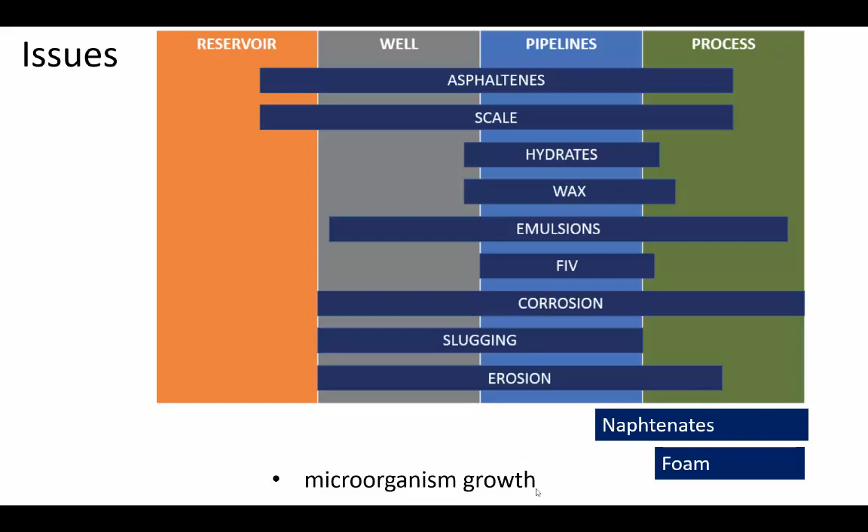My intention here is to simply go through at least a few of these, so we have a brief understanding of what they are, and then see how they affect the design or planning of the field.

Hydrates have a structure like shown in the upper corner, where you have water molecules forming a structure that houses small molecules—in this case, methane. They are formed at particular conditions of pressure and temperature. Essentially it's a solid structure that houses molecules of a relatively small size, a few Angstroms in size.

You see here what kind of issues hydrates can cause. You have a block of hydrate on the pipe, and here you have exactly the formation process—a video from DTU, Denmark Technical University, showing how the hydrate particles are forming.

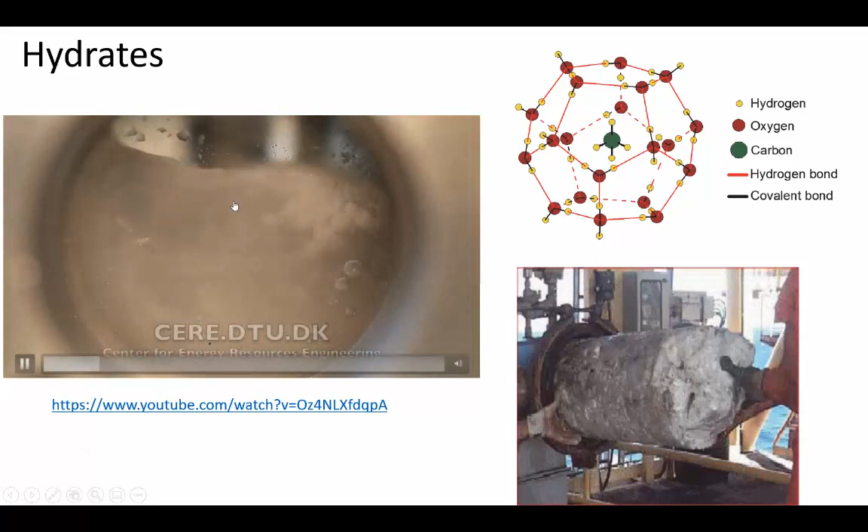Some of the conditions for hydrate formation: first you need water, because this solid structure, this crystal, is made out of water molecules aligned in a certain way due to the hydrogen bond. Then you have small hydrocarbon molecules, especially methane—you have methane hydrate, but you can also have hydrate of CO2, for example. And you need a particular range of pressure and temperature.

In a simplistic way, if we plot pressure and temperature, the hydrate equilibrium line looks something like this: for high pressures and relatively low temperatures, or for very low temperatures you have relatively lower pressures. All the area to the right is where you don't have any risk of hydrate, and to the left is where you have hydrate formation.

If we put here to the right, showing the same pressure and temperature diagram, I'm putting the phase envelope of the fluid in the pipe—the inlet, point 1, and flowing towards the outlet, point 2. What happens typically in flow lines and pipelines when transporting fluid from high pressure to low pressure, like the separator facilities, is that the temperature is reduced. Usually the environment is at a lower temperature than the fluid, so there's heat transfer and the fluid loses energy, heat, to the environment.

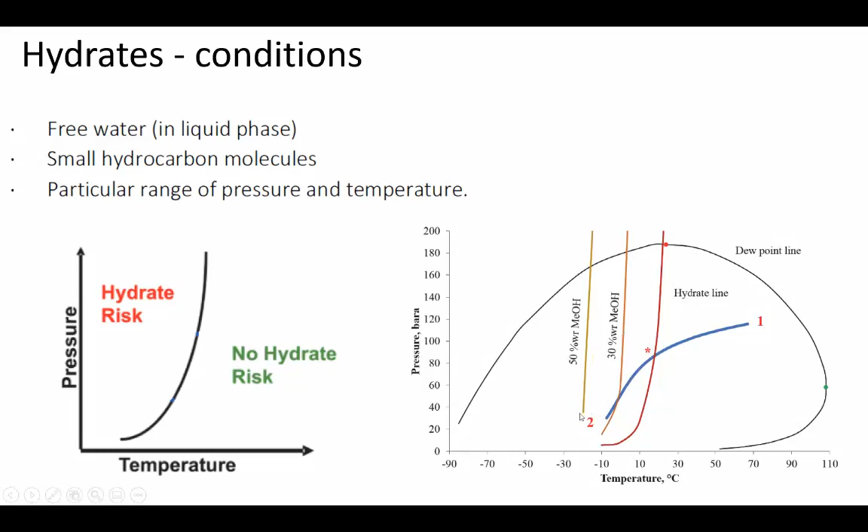Very quickly, wax basically are large alkanes, paraffin molecules, from about C18 to C36, long chains. They form plugs as well - they accumulate on the wall and can also cause plugging.

The main difference between wax and hydrate is that this process occurs gradually. It's an accumulation, like when you have accumulation of fat on the arteries, which causes the cross-section area to become smaller and smaller. So it's not something that suddenly plugs the pipe, but something more gradual.

Here you have a diagram - we're going to see it just now. Essentially if you plot it in pressure and temperature, you see that for low temperatures you have a region where wax particles come out of solution.

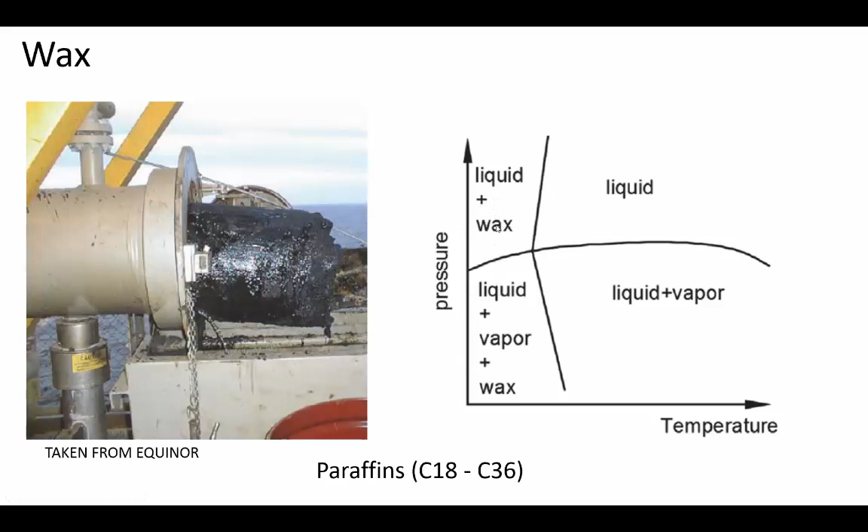That's an experiment where I'm measuring the oil viscosity and reducing the temperature. In this region you simply reduce the temperature and the viscosity is increasing. At some point you reach what is called the cloud point, also called the WAT, the wax appearance temperature.

That's where these wax crystals start to precipitate from the oil - we have an oil and we are measuring its viscosity. After that point you have an increase in viscosity, partly due to temperature simply reducing, but also due to these wax particles causing the rheology of the fluid to change.

It's like a drilling mud where you start to add solids - it behaves in a non-Newtonian way. So in this region you have a change that can make it quite difficult to move this fluid because it often exhibits non-Newtonian behavior.

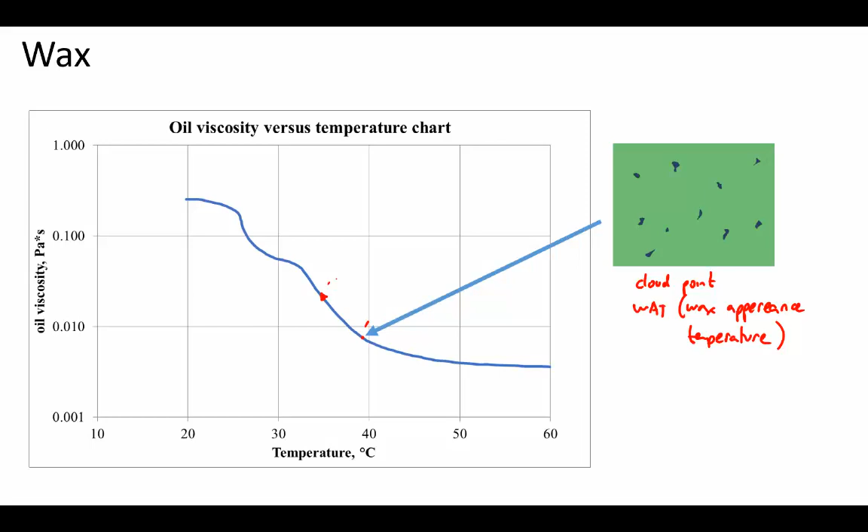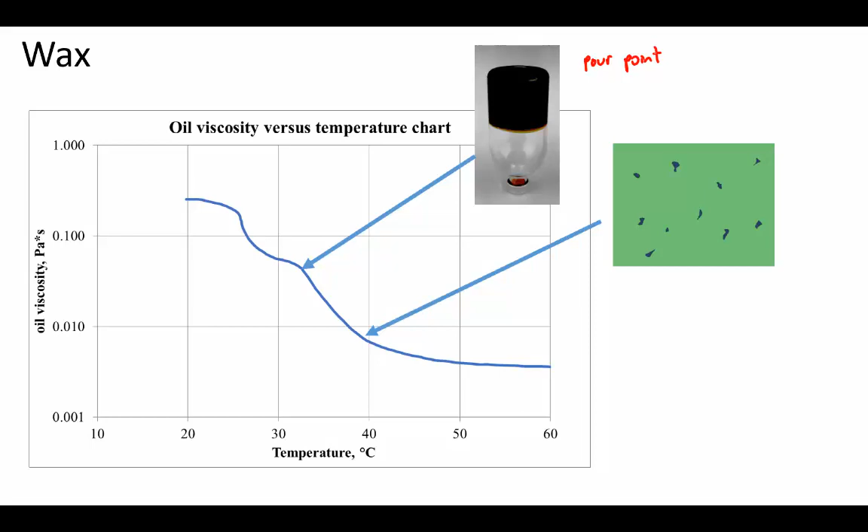Then you reach another point called the pour point, where it becomes extremely difficult or impossible to flow normally. The analogy is if you have this oil in a glass and try to pour it, it will be fairly solid or very difficult - it will take a long time to move.

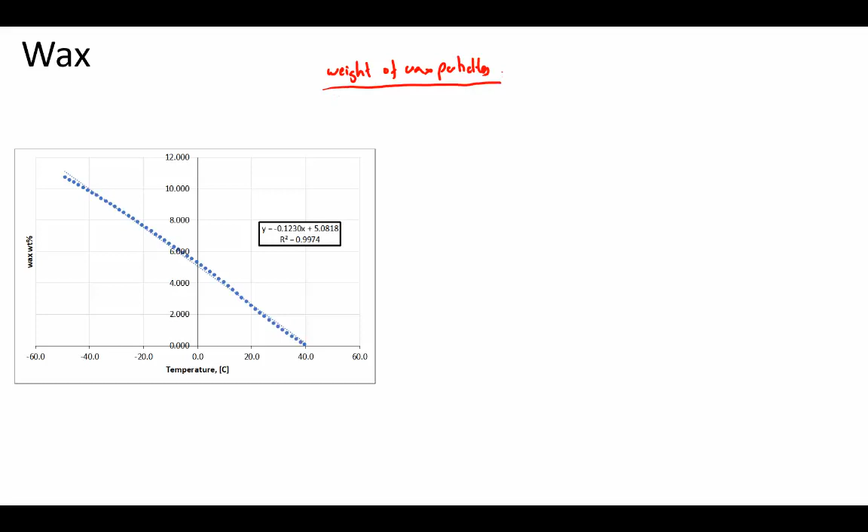The mechanism of wax - here I'm showing the concentration of wax particles measured in weight percent, the weight of wax particles over the total weight, times 100. You see that initially you have no wax particles, but then when you reduce the temperature, they're starting to come out.

This is the WAT - before you didn't have any wax. After you start reducing below the WAT, in this case 39, you start getting more and more particles until, at minus 50, they take up around 11% of the total weight of the mixture.

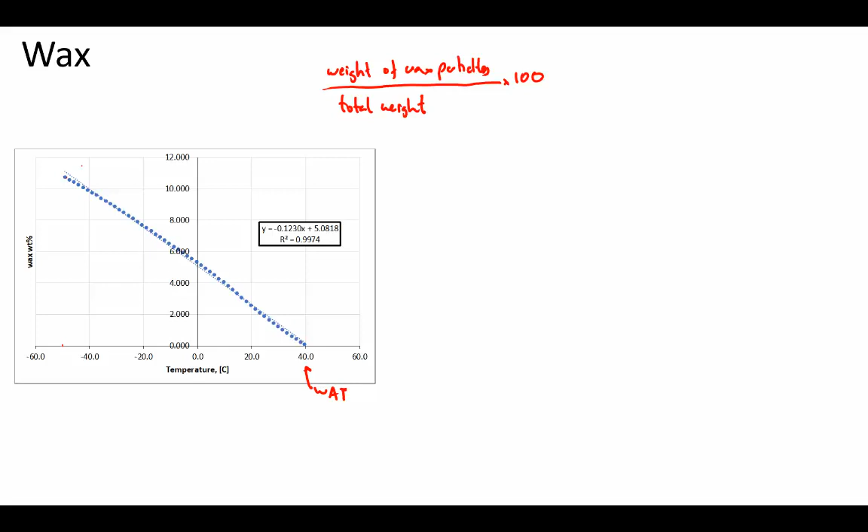So that's one type of experiment done on wax. One thing that happens with wax is that if we see the cross section of the pipe, we have the temperature typically plotted along the radius of the pipe. We usually have a high temperature, and it starts to reduce until we reach the wall, and then it continues to reduce.

So if the fluid is below the wax appearance temperature, the concentration of wax particles close to the wall, which is the coldest, is going to increase. So the concentration increases there, while here, because the temperature is slightly higher, it will be lower. So that causes a gradient of concentration.

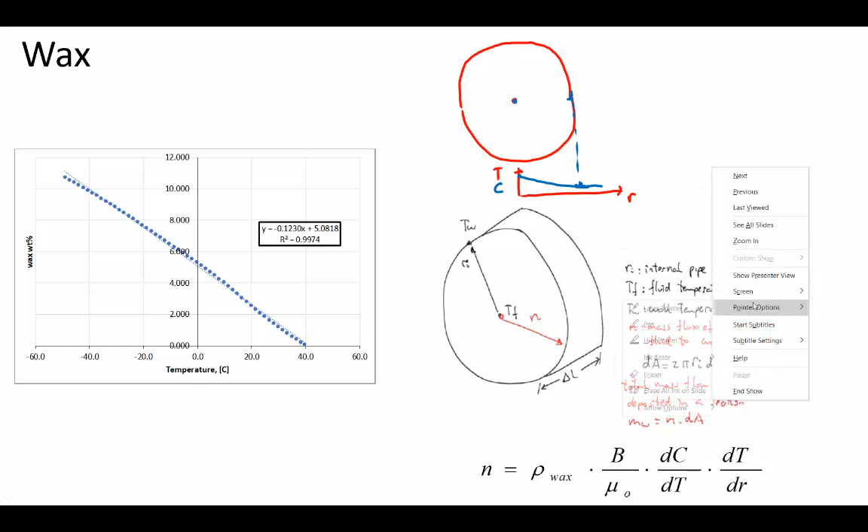Also, if I plot the concentration of wax particles, this C has the inverse concentration profile. C will be something like that, where you have high concentration of particles here and low concentration here. So it's that difference in concentration, but in the liquid it's exactly the opposite. In the liquid, I have less particles, less wax that is dissolved in the fluid.

So I create essentially a travel or migration of wax particles, or wax components, or wax molecules, to the wall. So essentially, the wax that starts to precipitate has some mechanism of how it adheres to the wall. The wax that is coming out of solution starts to stick to the wall, and we're not going to talk about that mechanism, but it has a physical mechanism for how it gets attached to the wall.

So wax precipitating is not enough, you also have to have a cold wall. In this case, the pipe has to be cold, because otherwise, if all this wax comes out of solution, then I won't have any problem, because then the fluid won't have any more wax to precipitate. But in this case, we create a concentration differential, and then I have migration of wax molecules dissolved in the liquid that migrate towards the wall.

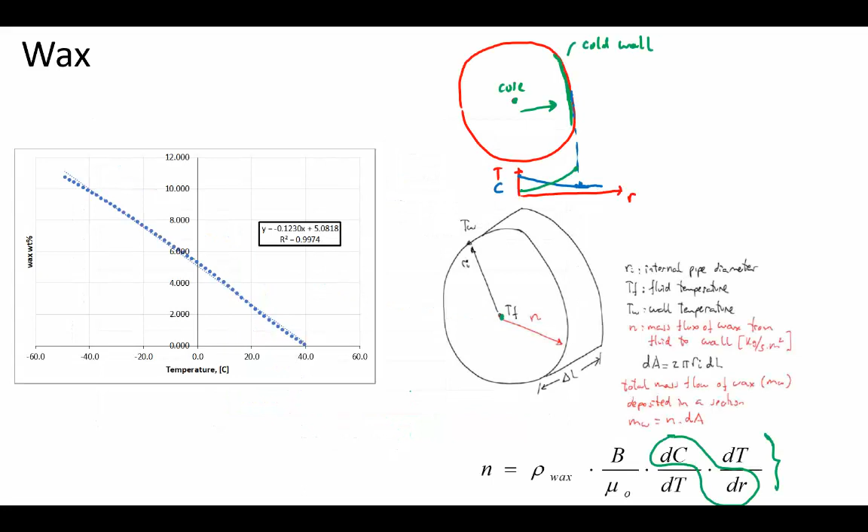And what's driving the process is essentially this. What defines the dT/dr is basically that difference.

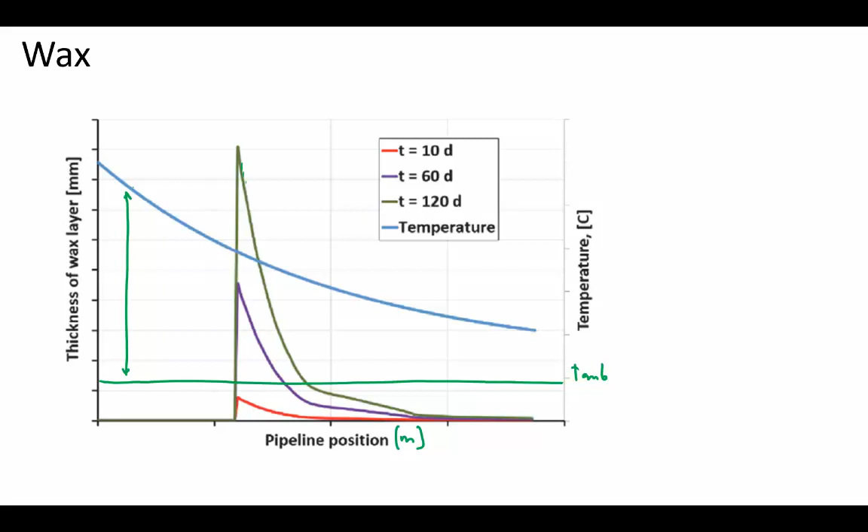Okay, asphaltenes, they are a bit from the same family as wax, but quite different. It's also some solid tar-like substance like asphalt on the street, but instead of being made by long alkane chains, it's made by cyclic components that have oxygen, nitrogen, sulfur, and are cyclic hydrocarbons, quite heavy with very high molecular weight.

And of course they make a much more crystal-like structure, much harder than wax.

They're caused by a few mechanisms we're going to discuss in our summary table later. But essentially, if you add a light component, like lighter alkane or lighter paraffin, some gas, it affects the solubility of this component in the oil, and then it precipitates.

Also, it can naturally exist in the oil, like if you have heavy oil in tar sands, they have these components naturally occurring, and they attach to the wall, usually to imperfections. There is always a component of how they attach to the wall, some effect of the interfacial properties that lets them attach to the surface.

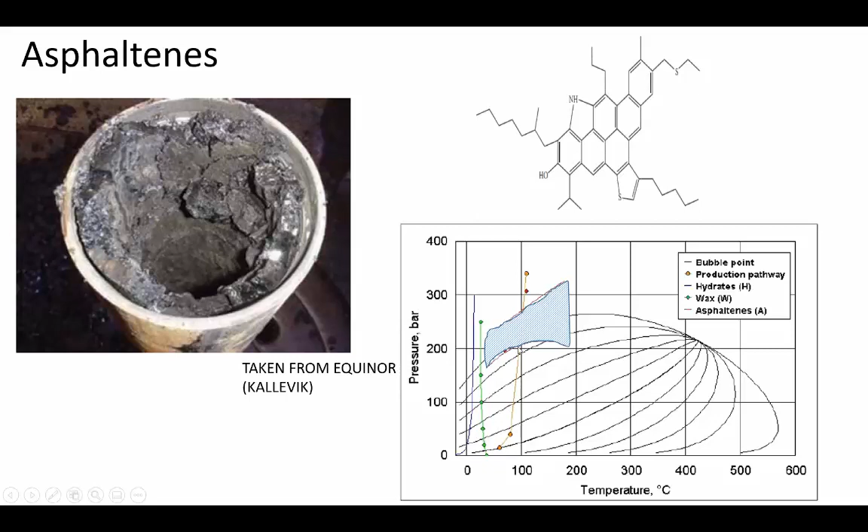So they occupy, it's like they were occupying more space, meaning they're increasing in quantity in a way. That causes these guys to precipitate. And essentially it disappears because at some point all of these light components go to the gas, and then the oil becomes heavier again, with the heavy components.

Scale, deposition of these minerals, these salts, on all kinds of components, and scale deposits on imperfections that we have - grooves, paths, valves that they deposit on. Typically this is barium sulfate, calcium carbonate, and even regular salt.

And we have different mechanisms for scale to occur. Again, this is not like asphaltenes and wax - it's not something that's going to block from one day to another, but it's also something that takes time. It's an accumulation process that happens over time.

But basically, you have two mechanisms, the most common being when you have, for example, formation water that is rich in these minerals, these components, and you mix it with injection seawater that is rich in SO4. Then you join these two, and boom, you have this scale, this salt.

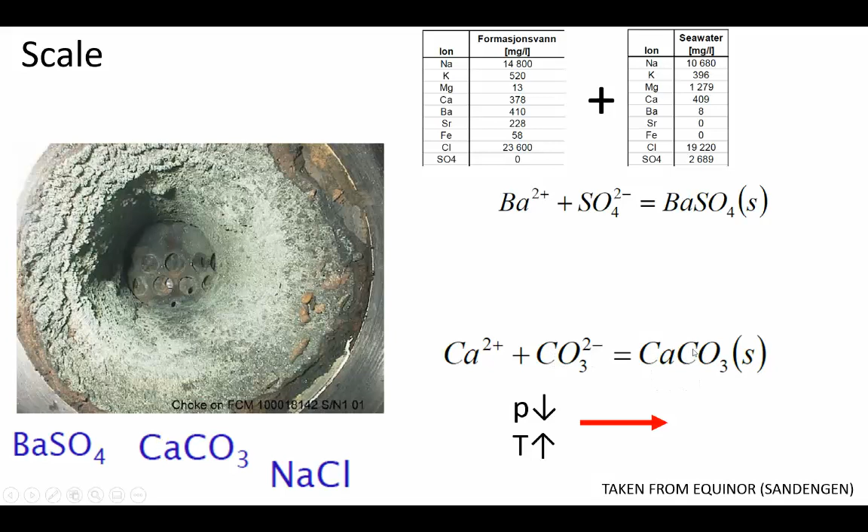Also, another process occurs with CO2 - when pressure goes down or temperature goes up, the carbonates tend to dissociate, and then they tend to join with calcium. So those are two different types of scale.

Erosion refers to the loss of material, of solids, of components, of pipes. In this case we have a choke.

I don't think we've discussed chokes, but essentially this is a cage choke where the fluid flows around the choke and then enters through the holes. If you see it from the top, you have a stream jet hitting on both sides, so they hit each other in the center and then continue to flow down. In this case, erosion actually affects the integrity of the choke and it doesn't operate normally anymore.

Here you have a manifold where, because of the change in direction of the fluid, you have some areas with high velocity, and that can also create erosion.

Erosion requires a solid particle or some sort of particle in the fluid, typically sand due to sand production. High velocities together with sand production means the particles are hitting the wall repeatedly, and that causes this loss of material.

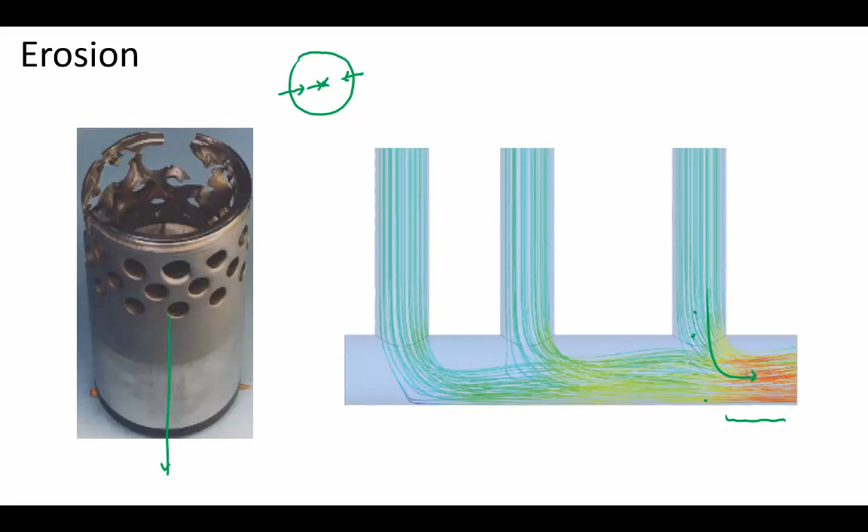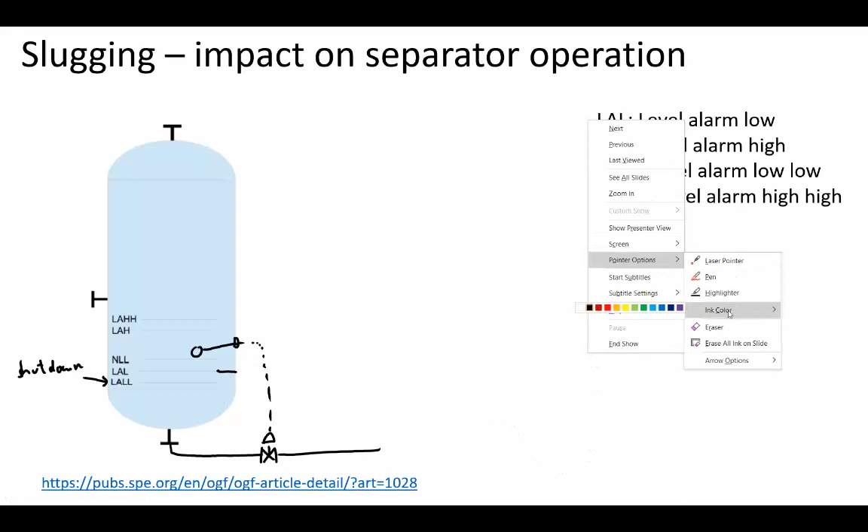So the point is, when you get a slug, let me change the color again, typically you have some room for the slug if something happens. You have some distance or volume between that and the normal liquid level, and this will be your buffer for slug handling.

But as you can see, that volume can be relatively small. So you can take slugs of moderate to small size, but if you have big slugs, that can be an issue, because if you receive that continuously, you're going to shut down the system. You send the signal to close the valve and stop the process. Restarting the process is a long task requiring a lot of hours, and in the meantime you're wasting production.

And it's not enough, because it takes some time depending on the slug you're receiving. Here we say QL versus time: you receive a big batch suddenly, and you don't have enough time for the valve to act and take all of that fluid out.

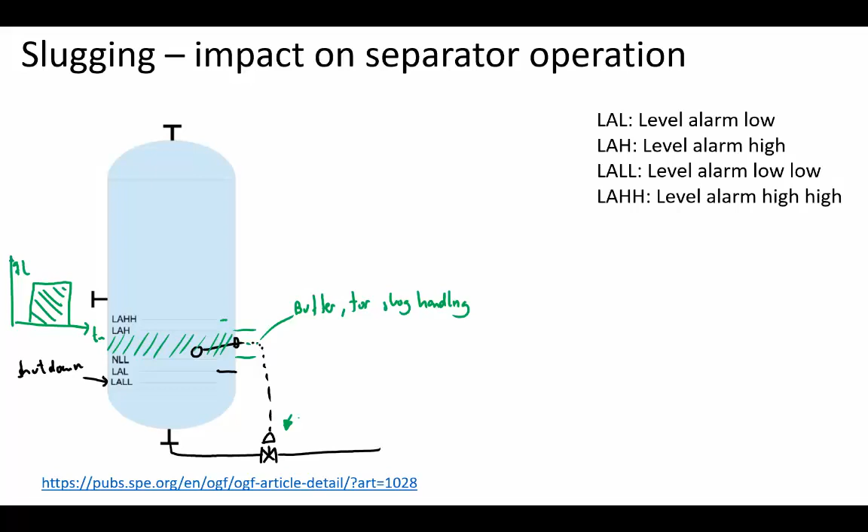The same thing applies if you have a horizontal separator. The main risk there is if the liquid goes above a certain level, you get significant entrainment of liquid into the gas line.

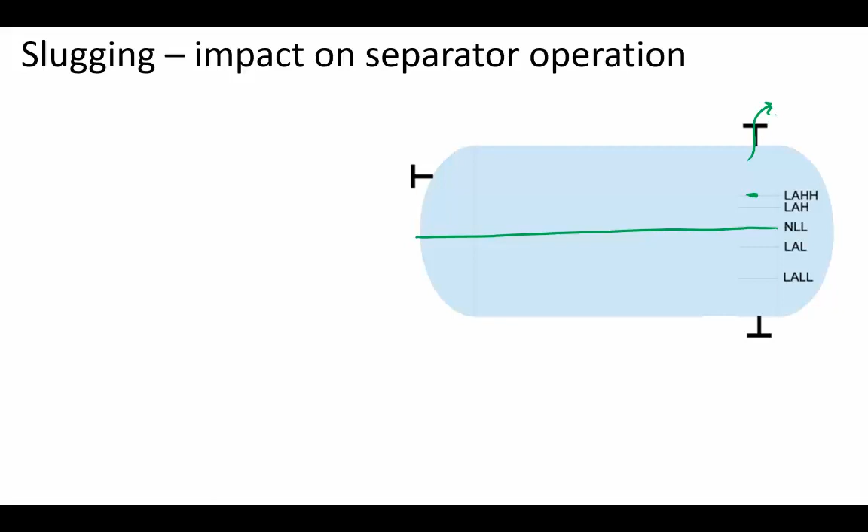Here is a video. So in case we know we need to handle slugs, typical in pipelines with gas and liquid, you use this type of separator called a slug catcher. The inlet is on this side below, and you have a distribution manifold that goes through several pipes. Here you have liquid, and you see how the slugs come in and accumulate. These are inclined, reducing the elevation along the pipe, so because of its big volume it can absorb these variations in inlet liquid.

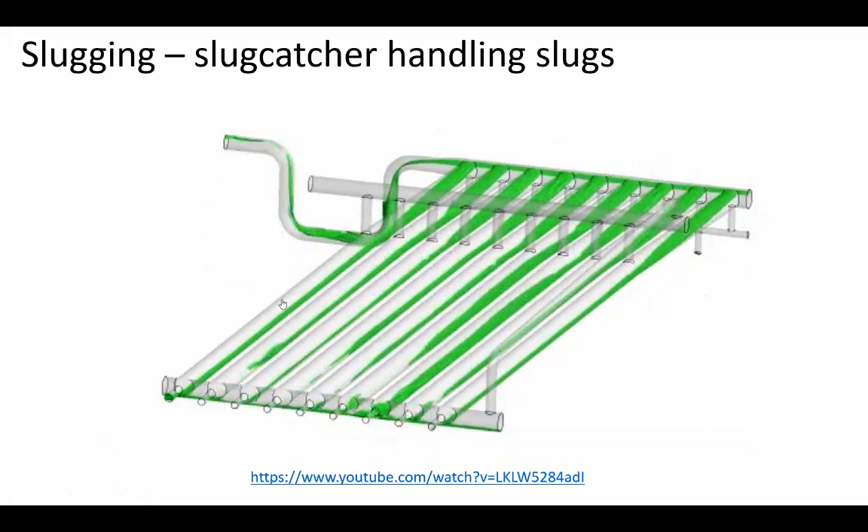The main problem is you cannot have this on a vessel. So if you have slugs and you only have a vessel, you have to find another way to handle them. This type of slug catcher can only be built on a kind of land facility.

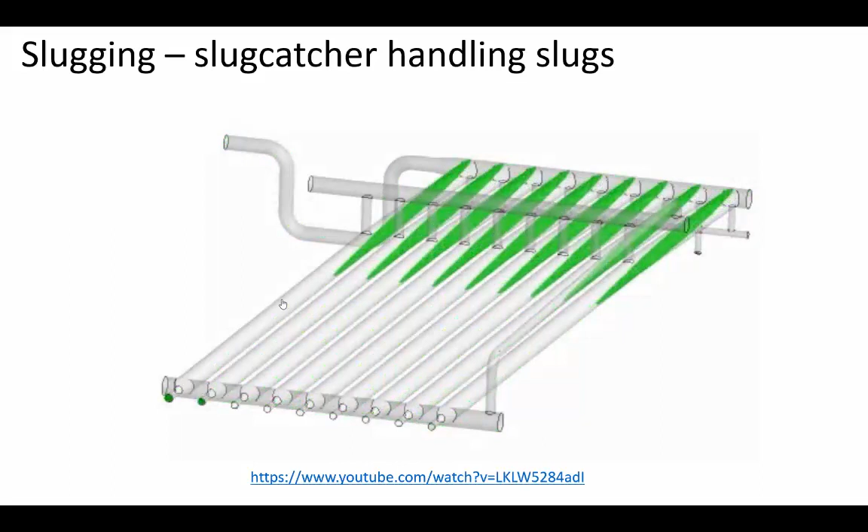Another problem we have is corrosion, an electrochemical reaction where I lose material in one area location and gain it in another, and that can cause a lot of issues with integrity. You see here part of a casing that has pitting, and another part where you have growth of material, actually from the contact of the metal with water.

You have another typical issue in gas transportation, for example, with water that is either free or condensing from the gas, which can cause corrosion. This is called top of line corrosion.

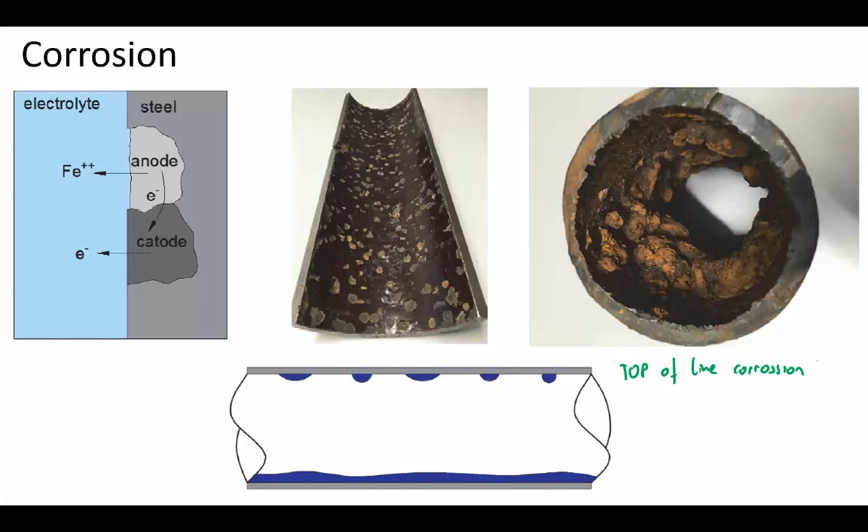Emulsions happen, for example, if you take a bottle with water and oil and mix them vigorously. That's what happens when fluid goes through valves, chokes, or a manifold. It has to change direction multiple times and gets mixed, so you end up with a fine, stable dispersion.

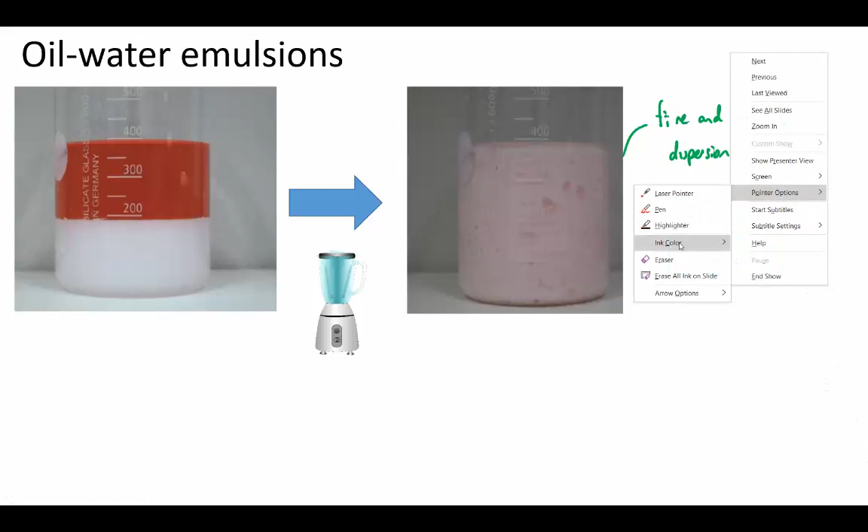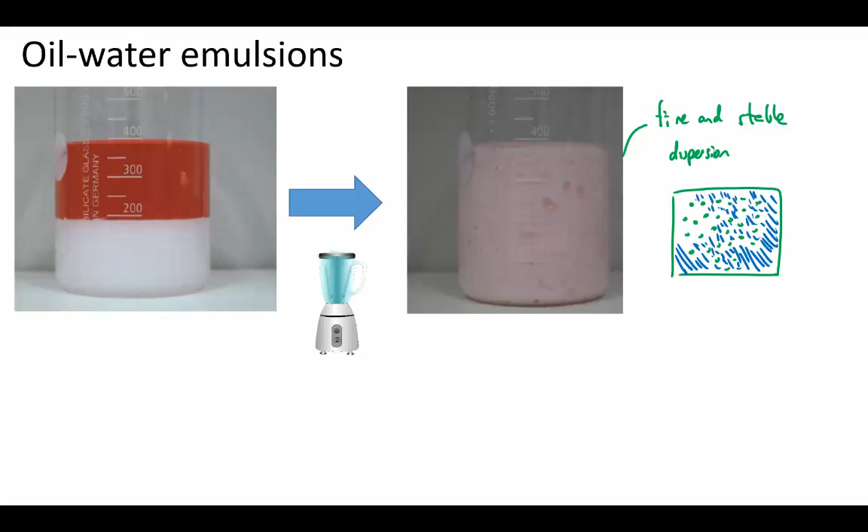If we look at it, we still see some small particles of oil, so we'd say it's a fine dispersion of oil in water, very fine and very stable, with water as the matrix. You can also have dispersion of water in oil, or multiple dispersions, one inside the other. But essentially the definition of an emulsion is that it becomes quite stable, so to separate it will take significant time, and the particle sizes are very small.

One of the problems for separation is important: if this emulsified mixture reaches the separator, remember separators typically have a retention time on the order of minutes, maybe 3 to 5 minutes. But if it takes a fraction of an hour or an hour to separate, that's not something you'll be able to handle without a much bigger volume. So you won't be able to separate it.

Another issue is that this emulsion—if I plot the viscosity of the mixture against the amount of water it has—this point is 100% water, this is 100% oil. As I increase the amount of water, I get a water-in-oil dispersion in a matrix, and the viscosity increases until I reach an inversion point, and then it starts to decrease.

That inversion point shows a big change. The oil had a viscosity of 80 centipoise, but when I add water, I get a viscosity almost 10 times more—maybe 7 to 8 times more—which is a big problem for transporting this fluid in the flow lines.

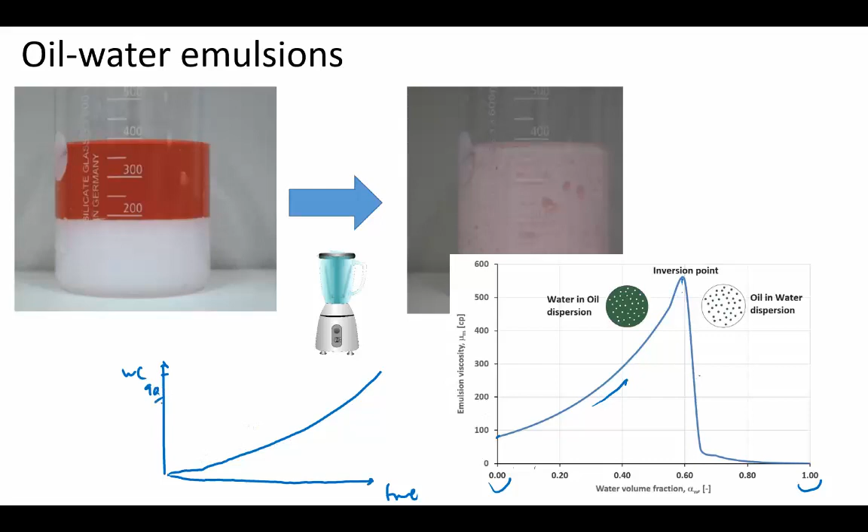After that, I have a sudden drop. So remember, in the life of the field, as time goes on the water cut typically starts low but then increases. I'm going to pass probably 90% here, and at some point cross the inversion point. If I have an emulsion problem, I'm going to experience this issue on my field.

Foam is when gas becomes trapped, covered by oil or liquid. This is also a big issue to separate, and it also triggers the level control of the separator.

Other mechanisms relate to restricting the temperature and pressure along the pipe, since they can move into the danger region. Some measures aim to avoid that happening—one is to avoid losing too much temperature, which means improving the thermal insulation. You are giving energy to the fluid to compensate for what is lost to the environment.

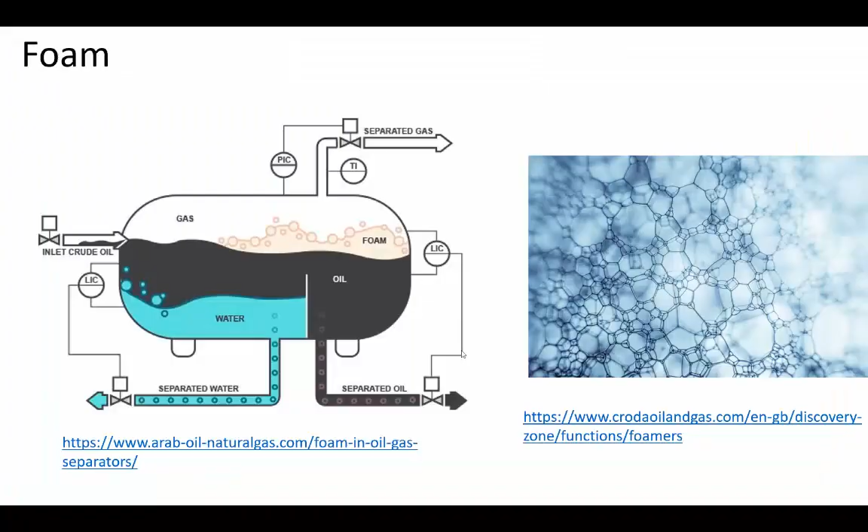Essentially I inject gas on the riser base, on the example that I showed you before. I inject gas at this point to ensure that it will flow in a steady state condition. Choking topside sometimes helps, but remember choking creates an extra pressure drop and then I'm losing production.

Pipeline rerouting, that's something that is typically done. I try to find a configuration that won't cause slugs, if there is any such configuration. Also, subsea separation might help, but remember after the separator the pressure will go down so more gas will come out of solution. So it can help slugging, but you always have gas and liquid in there.

For that, I rely very much on a transient multiphase flow simulator like Olga and Leda to try to predict how, when, and for which conditions I'm going to have slugs. I also do structural analysis using FEA, finite element analysis, where I try to analyze the structure, the fatigue, the vibration, and I can do also laboratory experiments if I don't trust or if there is big uncertainty on the model, that the model is not performing well.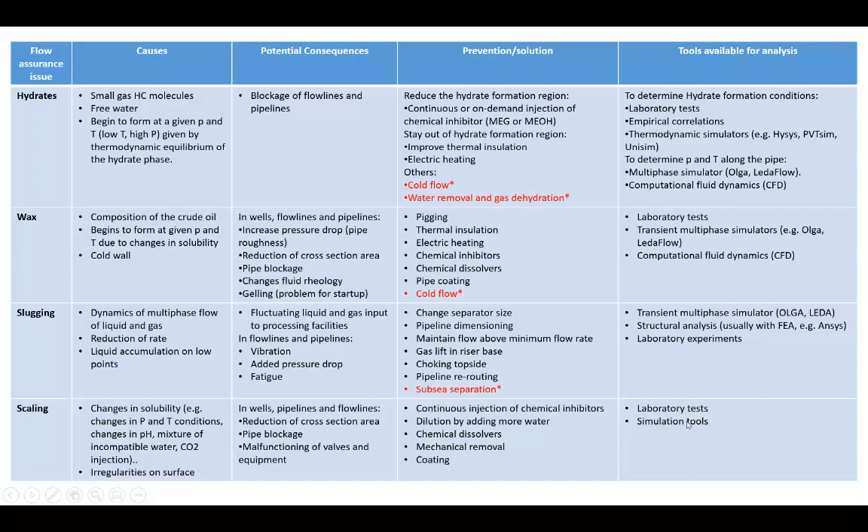Some measures I have to have. I have to change the geometry just to reduce the flow velocities. That means either changing the routing of the fluid, how it flows through the structure, or changing the size, maybe making it bigger, which can increase cost.

If there is some component I know I will have to change often, I make a schedule for replacement and maintenance. I can also reduce the flow rate, which has two effects: it reduces the high flow velocities on the component, and it produces less sand because the formation drawdown becomes less.

Sand separation has been used subsea in some places, and also coatings somehow. Some coatings have resistance to erosion.

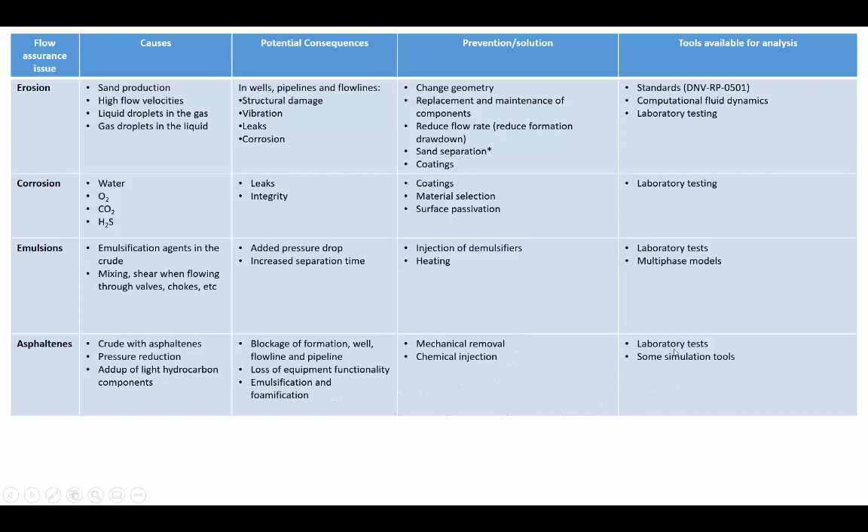For asphaltenes there is chemical injection and mechanical removal, but there isn't really a good measure that works against them, so I have to do laboratory tests or some other simulation tools.

So more broadly, to summarize the table I described before, one of the main remedies for all these problems is simply chemical injection - giving an inhibitor that is supposed to avoid the occurrence of the problem.

Other things affect my system design, for example pipe and component insulation, if I need insulation or not, so the temperature doesn't drop excessively and cause wax, hydrate, or other problems.

Heat tracing, in which I also heat the pipe - I wrap electrical resistance around the pipe and try to give energy to the fluid to compensate for what it's losing. Dead legs, we're going to talk about what a dead leg is later.

Pipeline routing, which we mentioned for slugging - for example, we might have to take a longer route, but then have fewer low points where liquid can accumulate, which can prevent the creation of slugs.

Well intervention - if I know there is something I have to clean often, like scale, asphaltenes, or wax, then I have to plan how often I have to go inside the well and clean it.

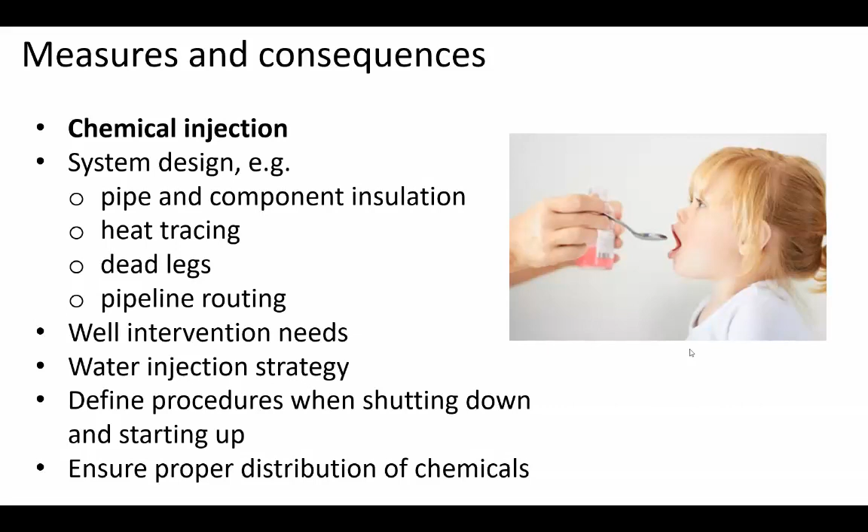Water injection strategy also matters - as I mentioned, for scaling, the mixture of seawater and formation water can cause scale, so I will have to add chemicals. I also have to define procedures when shutting down and starting up, essentially if I need to inject an inhibitor, for example for hydrate reasons, and ensure the proper distribution of these chemicals.

Here is an example from the PDO on Ivar Aasen, giving an overview of different chemicals. So these chemicals A and B, this is scale inhibitor A and B, two different types. I add one to the seawater and one to the produced water. This one is probably for injection, and this one is used because I can also have scaling in the water processing facilities topside.

You see how often - it says continuously, because I simply don't want to deal with scale at all. Corrosion inhibitor goes on the water, where I have corrosion continuously. Emulsion breaker, this is the demulsifier, continuous on demand, which is a bit strange, that I add to the oil and the water, total liquid. Foam breaker,

that I do when it's needed. When I start to have foam, then they inject this. The flocculant wax inhibitor, I do also on a needed basis, for example probably when it becomes cold.

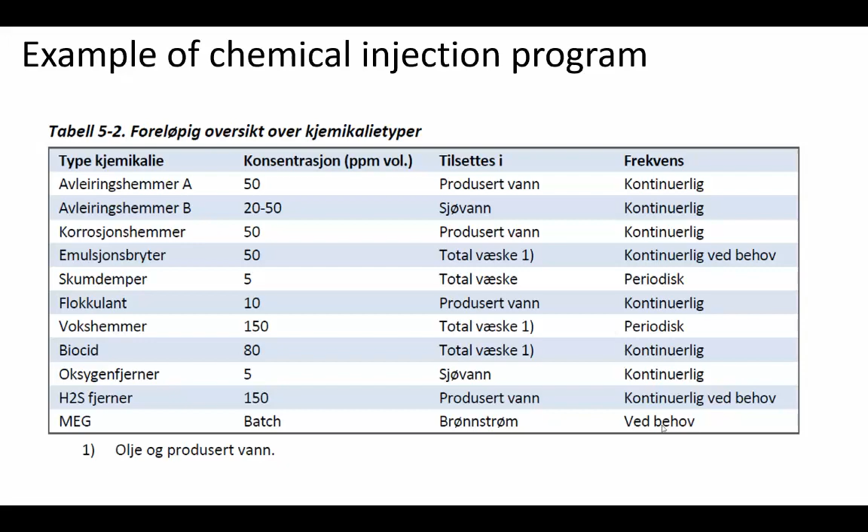Then we mentioned that we are injecting a lot of chemicals on the production stream, and we have to say exactly what these chemicals are for. If it's for disposal, for example, if the chemical is in the water, it will end up probably in the sea, so I have to be careful that the chemicals I'm using are not damaging to the environment and to life.

So you have different categories according to OSPAR - I forgot exactly what it stands for, but it's the Commission for Ocean Safety and something. You have different categories: Green - substances whose use and discharge offshore are considered to pose little or no risk to the environment, or no negative environmental effect.

And for example, the MEG is in this category - something I can release without any problem. The main problem with MEG is that it's costly, and I have to inject a lot of it.

Then I have yellow, which contains inorganic chemicals that have low poisoning, and that break down 60% within 28 days. Then you have some other categories.

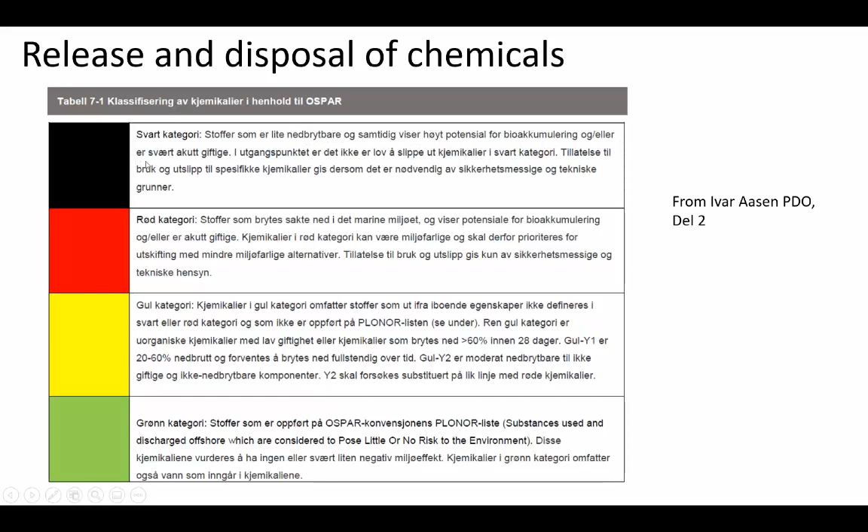So here we see some classifications of the different chemicals we use. For example, the scale inhibitor is yellow, and it's something we put on the water, so it will be on the water. It says it can be moderate biodegradable or no biodegradable, but it's not poisonous, and it's not going to accumulate in the food chain.

Emulsion breaker - all of these are red - and this emulsion breaker is dissolving the oil, and it's going to be mainly in the oil, so it won't end up in the environment in this case, though at least 5% will be on the water. Wax inhibitor again will be in the oil, completely in the oil.

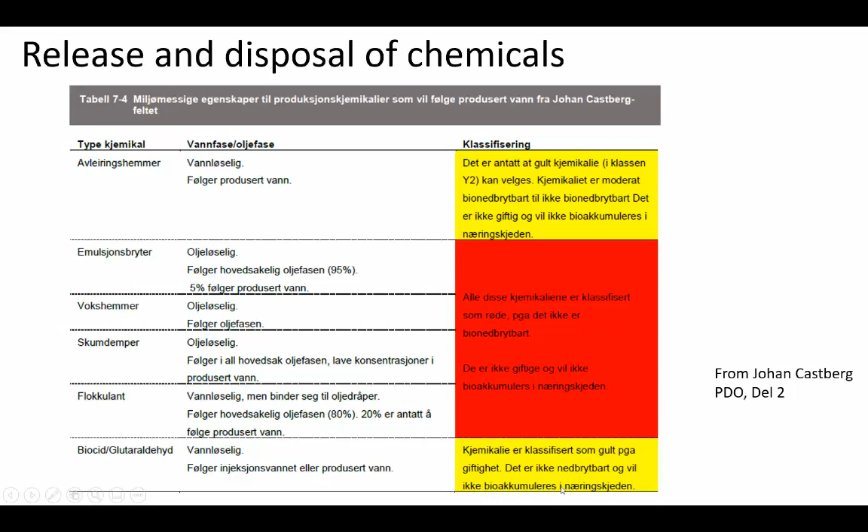If you want to know more about production chemicals, I suggest you get this book - very good, written I think by a professor from University of Bergen or Stavanger, if I'm not mistaken. There you have more information on our course. I just want to make you aware of these issues, but you're not going to become experts in chemicals.

So some tasks that we do during field development, during the early phase, DG0 to DG2, I simply have to detect potential showstoppers and communicate technical constraints or repercussions to the field planner. If I'm going to have slugs, if I'm going to have hydrate, I will have to inject methanol. If maybe it's a waxy crude, that can cause a lot of issues, and I have to run laboratory tests with the few samples that have been made.

Later in the process, when I already have a concept and I'm preparing that concept, preparing the feed, then I have to refine the flow assurance strategy. I have to do even more laboratory tests, define a management plan, what actions I'm going to take for each, prediction of pressure and temperature along my components, a study of startup and shutdown, system design and verification, and also flow-induced vibration.

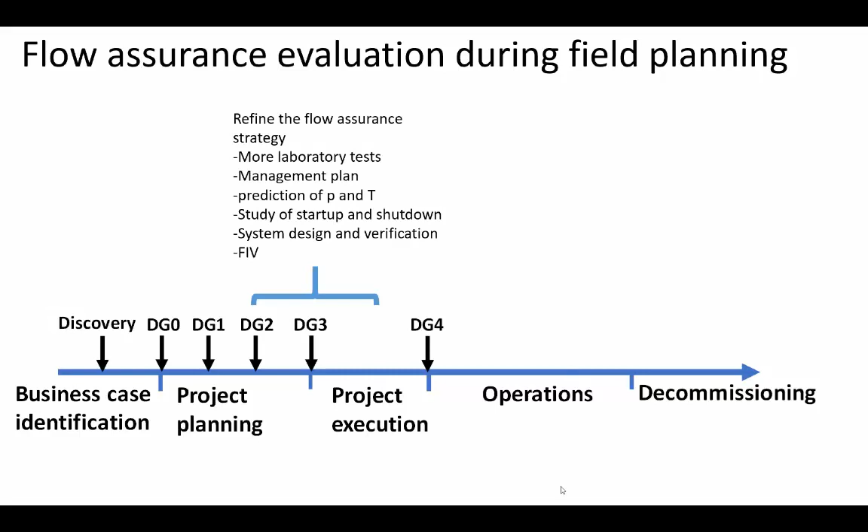So this is a comment about how we get our chemicals subsea. Let's say we have our manifold, right? We are going to take a case for satellite wells. Remember, I either use a jumper or I use a flow line. Here I essentially have one manifold, then I have another manifold.

Typically, inside the well, when you shut in the well, maybe the temperature will still be enough that it will be above, for example, the most important is hydrate, that is going to block completely the pipe. All others, like wax, for example, you can have some wax accumulated, but it's not going to plug completely the pipe. Usually when I start producing again and the temperature is increased, they are going to be dissolved again.

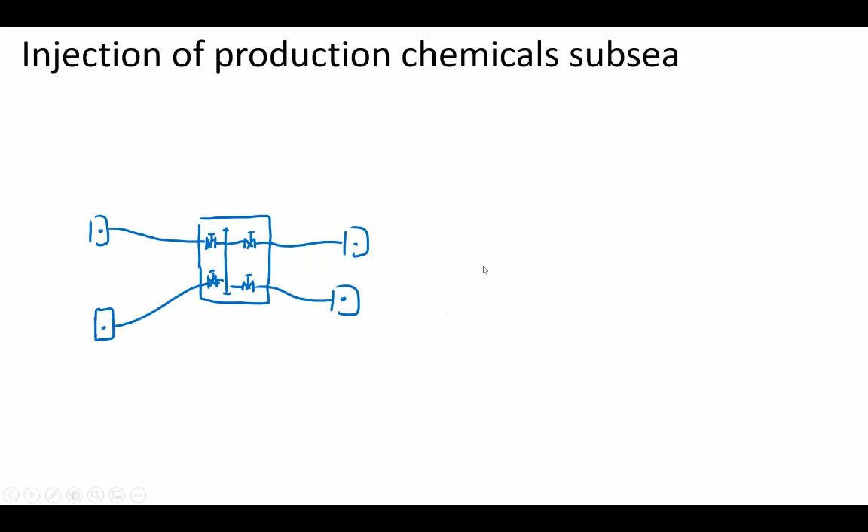But with the hydrate, for example, it's very special. So let's say I have here these two, let's put two more wells. So I have to reach these wells, and I do that with - let me change the color - I use what we call an umbilical. We'll talk about it later, but this is an umbilical. It's a collection of pipes that I wrap around a flexible cover.

And then I send it to a unit that is called an SDU, typically has this name, subsea distribution unit. And then here I provide to each well the chemicals that they need. I also provide other things - maybe they need power, they need the signals for the instrumentation, but I also give the chemicals.

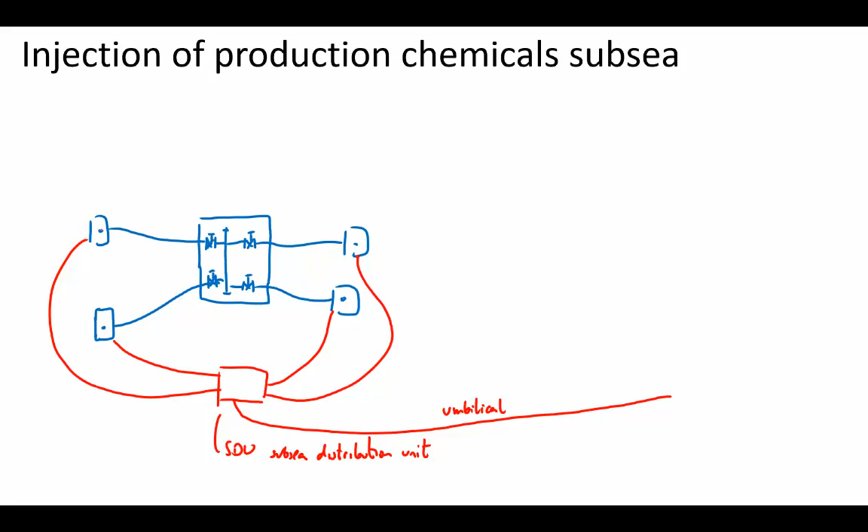Like in this case - this figure was a bit cut - but essentially you see here you have the umbilicals, you have every well, or every cluster of wells, and each one of them has their own riser going to this platform, called Njord. But on the other side you have the umbilical, which is here, going into this SDU, which is here. And then this SDU is giving the chemicals and also other things that each one of these wells needs.

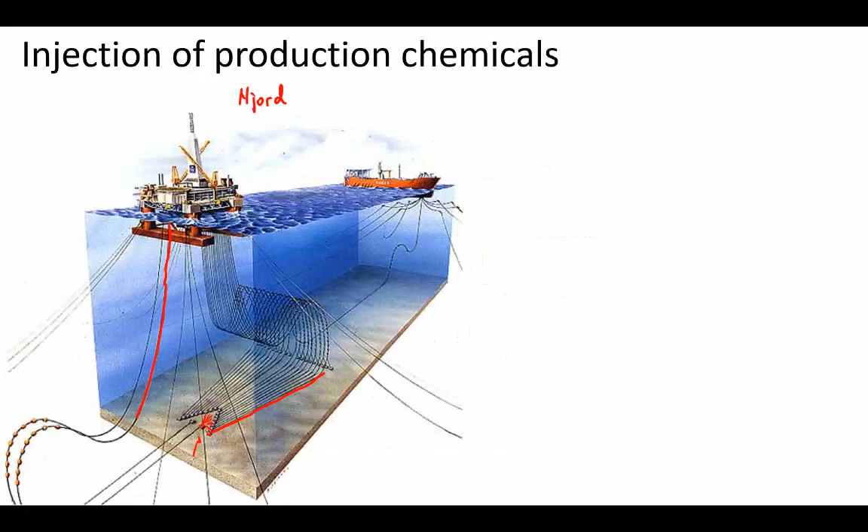That's how it looks like, the SDU.

And you'll see for each well they have 1, 2, 3, 4, 5, 6. It seems that they have 6 wells on each side. But essentially what you have, if you receive this umbilical, it has all of these things - a scale inhibitor, hydrate inhibitor, biocide, corrosion, wax, communication, power, hydraulic. Remember this, we need to activate valves. The Christmas tree has quite a few valves - the wing valve, the swab valve, the master valve. All of these valves are operated with hydraulic lines, with oil basically. Then it goes into a manifold inside, and from that manifold you distribute to each one of the wells - well 1, well 2, well 3, well 4. And you have a valve. I think these valves here are on and off valves that you have, simply a manifold.

That's a cross section of the umbilical, that has what I told you, a cover - a flexible cover made of strings of metal. Then you might have a high voltage cable, in this case fiber optic for the instrumentation.

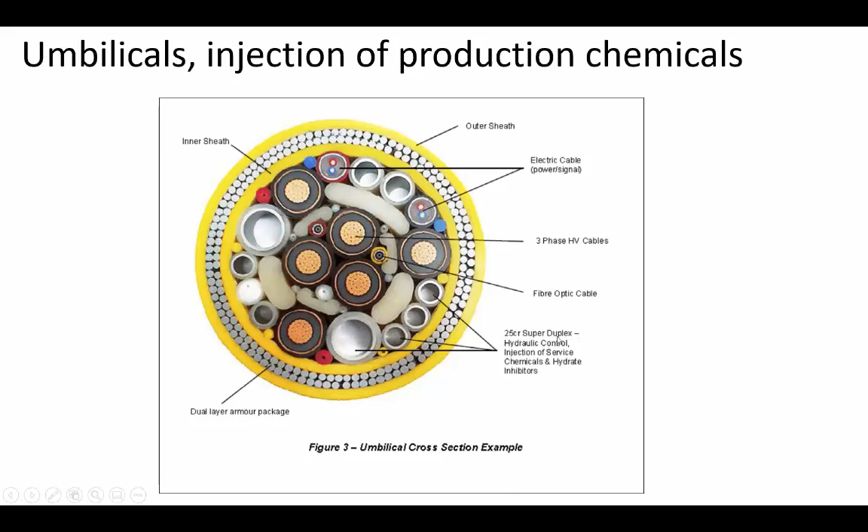You have lines for, and this big line usually is for MEG injection, is the biggest, and then you have other chemicals that are typically sent together, okay, either they are sent in batches if the injection is occasional, or they are sent mixed together if their injection is continuous. Okay, and this super duplex is simply the material it's used for.

Okay, you have here a more prettier drawing of how it looks like. So you have the top side where you send this umbilical, this collection of pipes. Okay, and then you enter into this subsea distribution unit. Okay, and from there you distribute to each one of the wells. That's exactly what you have. Okay, and I think here you can see all the different hoses with all the different chemicals you have for each well.

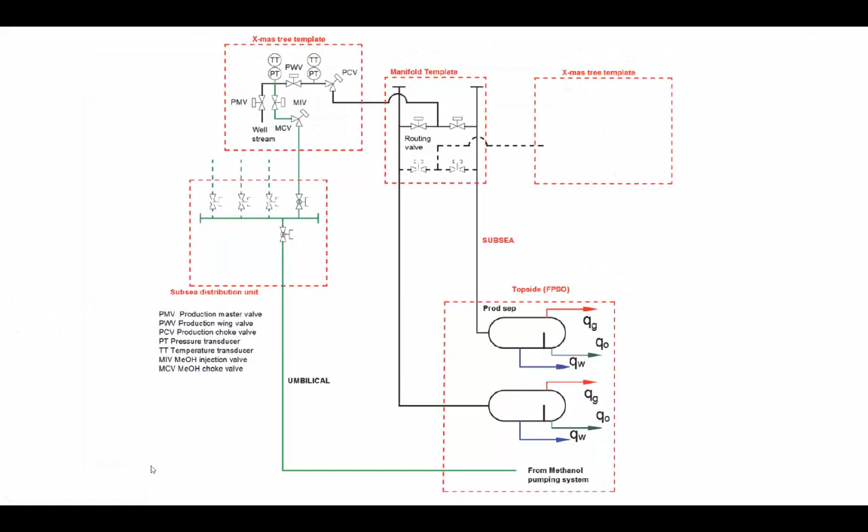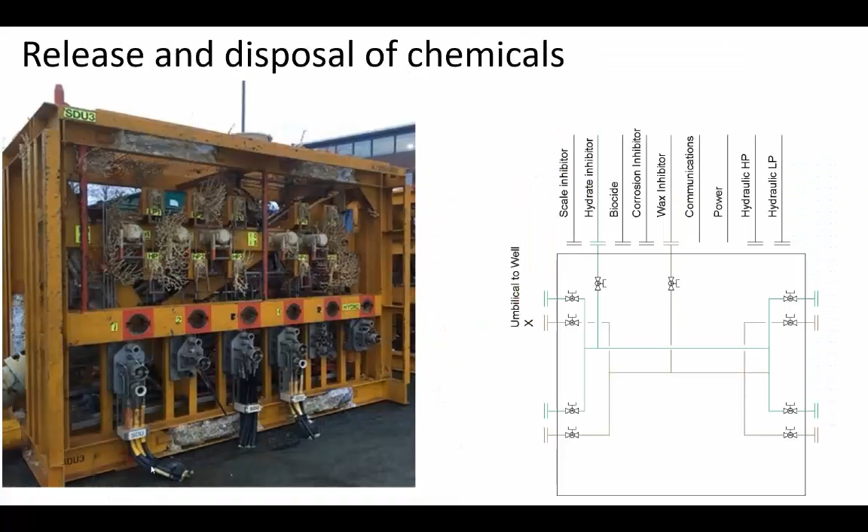Now, for template wells, the system is slightly different. Remember, these satellite wells, it's not the most preferred, at least in the Norwegian continental shelf. You use these template wells. So in template wells, you remember the manifold, okay? That the manifold had a few other things that we didn't discuss that much. We had the connection for each well, then we had the two routing valves, we have the two manifolds, and then we have the pigging valve, then we have these HIPPS, okay, but we didn't discuss the rest. Now the rest is essentially all of these hydraulic lines, chemical injection lines, communication lines, okay.

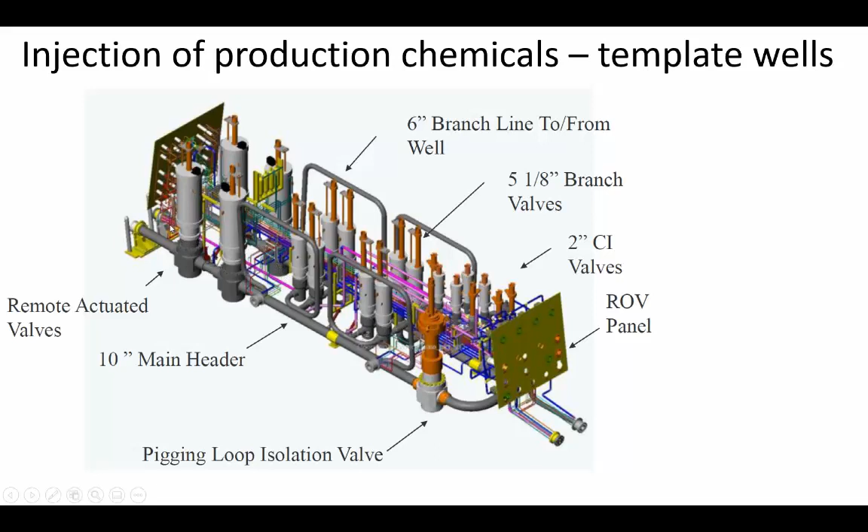So on this side, on the left, you have the connection to the umbilical, is receiving that, and then is splitting to each, okay, and all of these valves, they are to split if I have chemicals to be able to send one to one well or the other, okay. You see here the connector that goes to the well. There are sometimes things that I have to inject on the well, okay, or at least on the wellhead, okay, at least on the Christmas tree. So then I have these connectors typically used in this case, which is like a multi-bore connector. I have one connection which is for the main production fluid, and I have some other connectors that are, for example, communication. I have fluids, okay, for example MEG inhibitor, okay, and they have some guides to be oriented in the proper way. Okay, so it's a multi-bore connector.

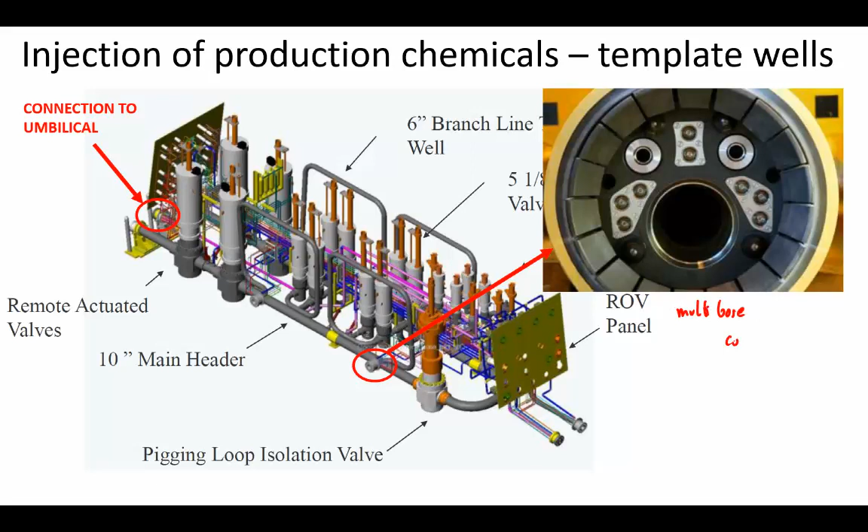Let me just write it here, multi-bore connector. That's more in detail how it looks like on the Christmas tree itself. Here I have this multi-bore connector. That's how I label it, multi-bore connector. Okay, then I have each, they connect separately. They don't, it's not allowed that this fluid will enter into that line. Okay, that's not allowed. Okay, and then you connect, that's the annular line, access to the annulus.

I have here, this is the MEG control valve, okay, which is simply essentially like a choke that I can use. If I need to have more MEG, I open the choke. If I need to have less MEG, I close the choke. And this is the MEG injection valve. Okay, here we have again another multi-bore connector, and I inject back here.

Just a few things. Just here we have our well. Here we have our wellhead. Essentially, it's not the wellhead, but the tubing hanger. Okay. Then we have this subsurface safety valve. Okay, subsea. No, I don't remember the acronym. Okay. But then you go up, you have the production master valve, you have temperature transducer, pressure transducer, you have a crossover valve between the annular, okay, and the tubing.

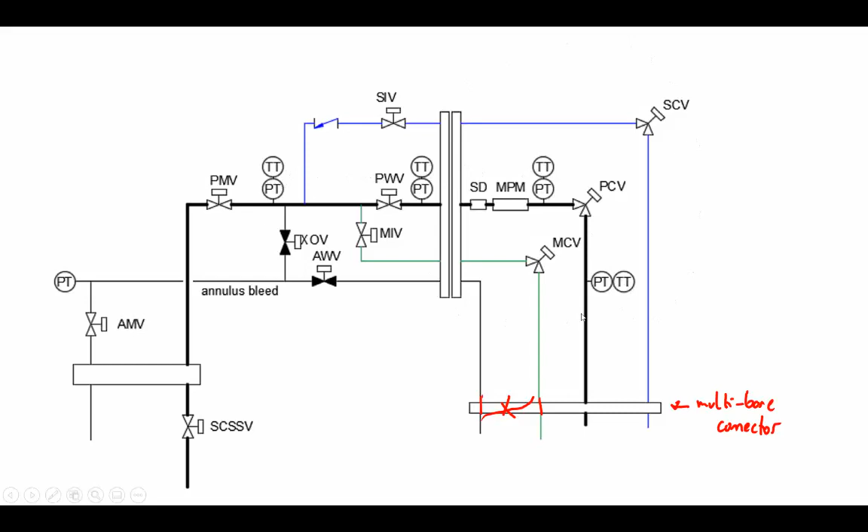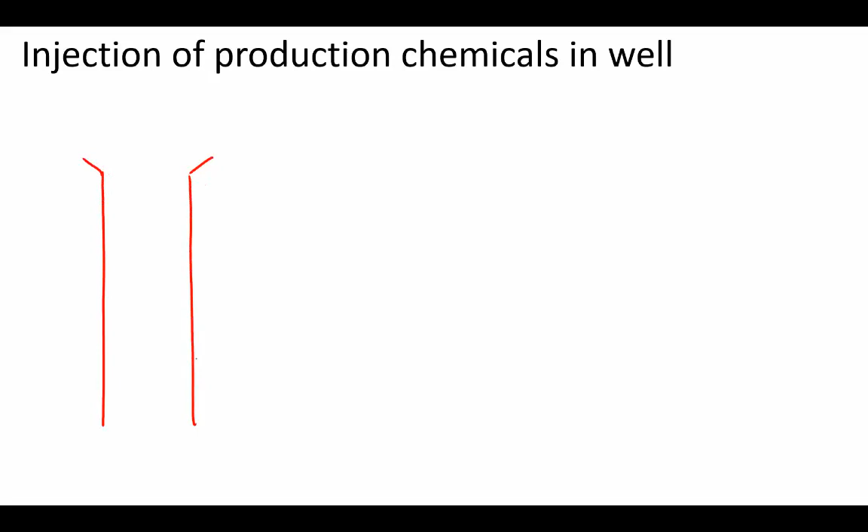Okay, and one thing is that some chemicals have to be injected in the well. Okay, for example, corrosion inhibitor, scale inhibitor, you also have the demulsifier. So you have, let's say, the production casing. Can you have my formation someplace here? Remember, I might have concrete, the cement. Okay, and I have my tubing.

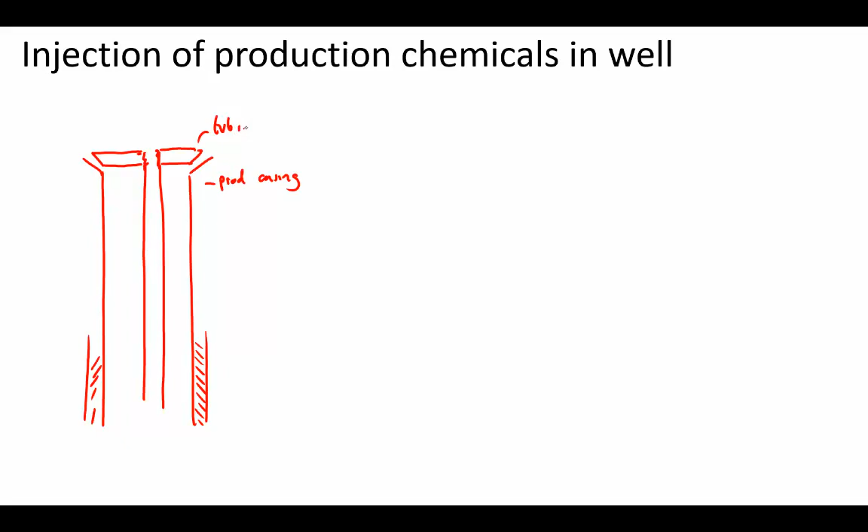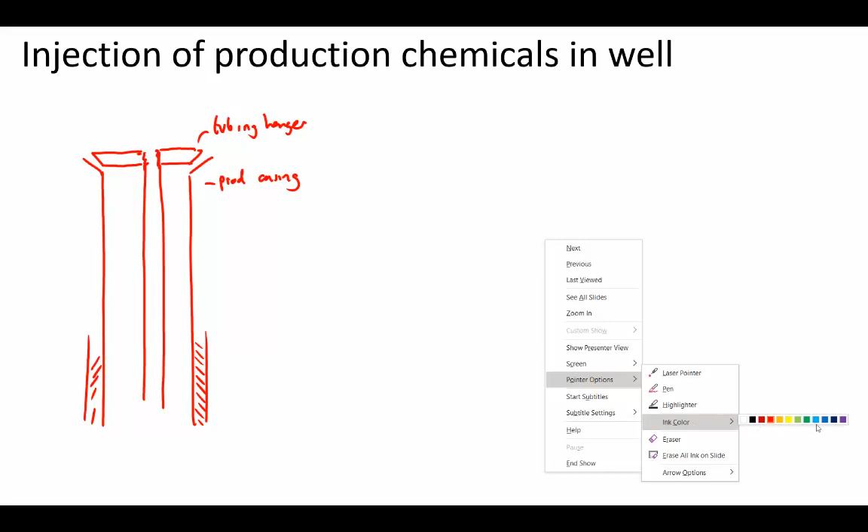Okay, that's a tubing hanger. And then what you need to have, okay, these penetrators, like the annular valve. The annular valve that I show here, simply you have a piece of pipe that will be open, and here you have this valve, that's the annular master valve. Okay, that's simply the way it looks.

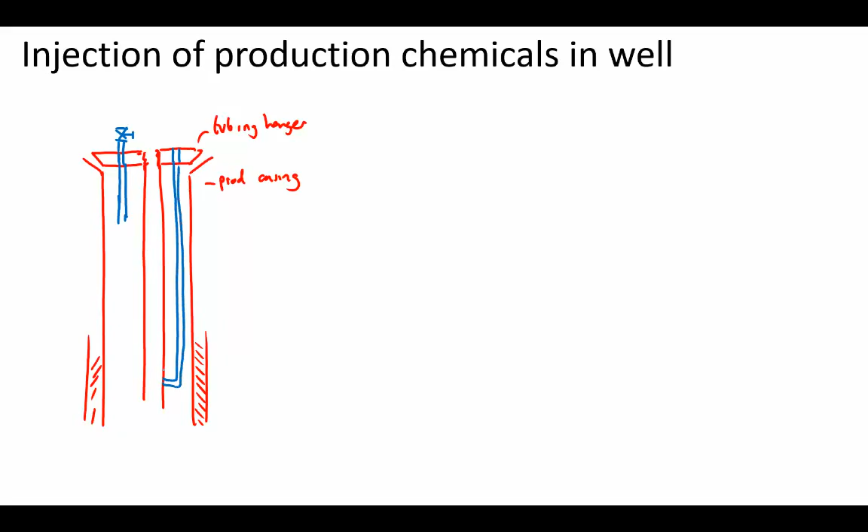But when you're injecting, for example, a demulsifier or scale inhibitor, you have to pass it through the tubing hanger, and then prolong with a capillary line. It's almost a very thin hydraulic line, and you're going to inject it where you need it. Usually if it's a demulsifier or scaling inhibitor, you want to inject it almost at the bottom of the well. So this part is the penetrator.

This is a capillary line, and this has some other names, but they call it the mandrel, the injection mandrel. So depending on how many things I have to inject, either I use the same line, or if they are not compatible with each other - that's something very important with the selection of chemicals - if they are compatible, I can send them on the same line, all mixed, but if they're not compatible, they can cause issues, and I have to create a different line. Let's say, for example, scale.

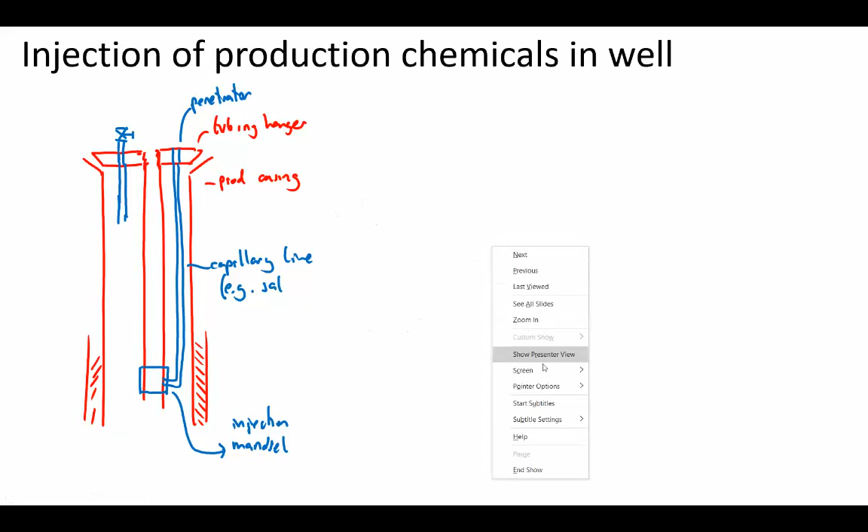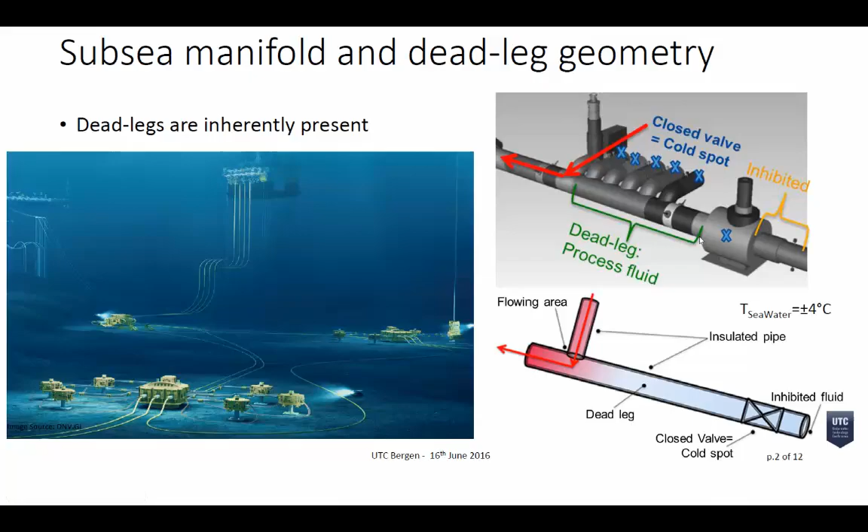In this paper, I took this from a paper where essentially they try to induce a vortex that is going inside the dead leg and is actually heating the dead leg. Like in this case, that's the dead leg. We are saying fluid is entering through here, and then the dead leg will be from here all the way to here, and even further. So dead legs, I have to be careful.

Then it's very important to use steady state flow simulators, essentially for pressure and temperature drop in pipe, but also in the process. For that, I can use HYSYS, GAP, PipeSim, Olga, LEDA Flow, Flow Manager, which is a software by FMC. Transient flow simulators are used for example for slugging, shutdown, shut-in, and startup. If I have slugging, I need a transient simulator. Some names are Olga, which is a Schlumberger product, LEDA Flow from Kongsberg, a Norwegian company, Flow Manager from FMC, and HYSYS from Aspentech, which I think is a Canadian company.